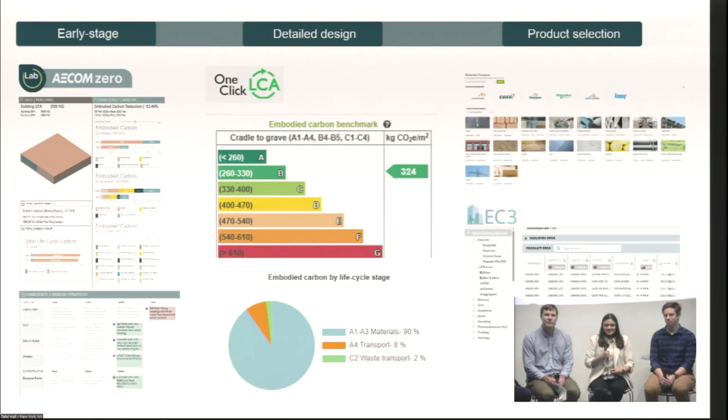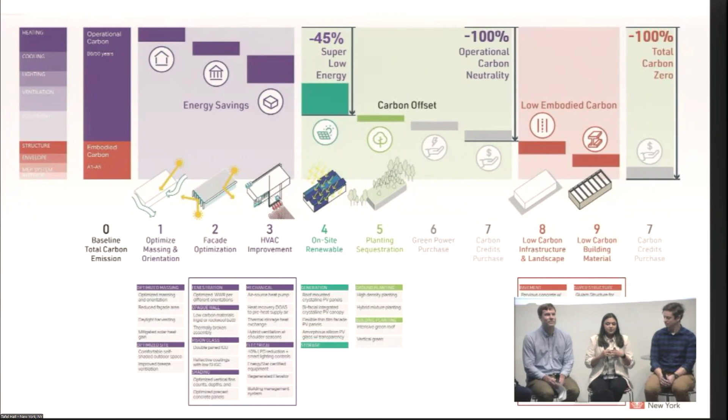One last thing I want to talk about is our decarbonization roadmap and how that integrates into our tools. This is an example of our decarbonization roadmap, which includes multiple strategies addressing operational as well as embodied carbon reductions. The tools we build out internally capture these different strategies that are part of the roadmap and integrate them into the tool itself.

This here is a snapshot from our internal tool called AECOM Zero. It's a parametric dashboard that includes all of these strategies, and what that does is enable us, from the early design stages, to understand which strategies have a higher impact towards getting us to that decarbonization goal.

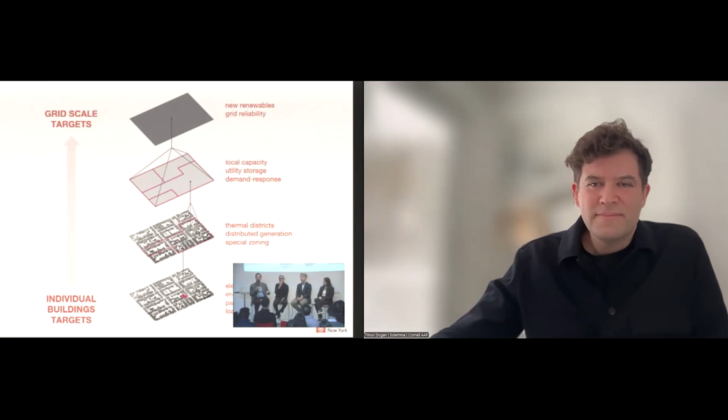Suddenly you need to think about peak loads. You need to think about things that happen in the middle, right? Like thermal district, distributed generation, distributed storage, and try to enable those larger goals that we're setting at the grid, but at the building decision scale. So the question for our panelists is, what is the role of technology in all of this? And in particular, we're going to be talking a lot about energy modeling and data analysis. So with that, I'm going to pass it to Shresh.

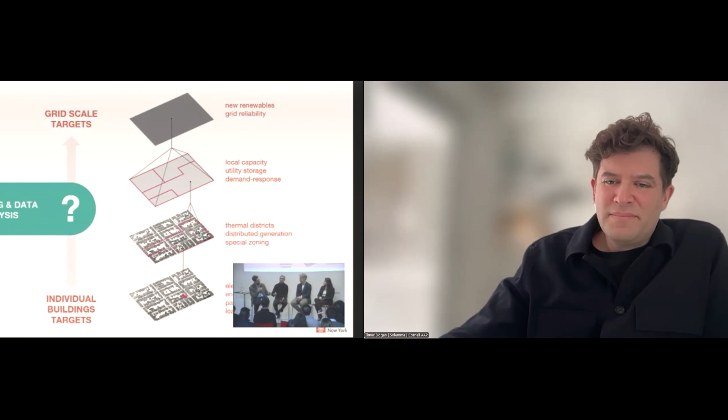All right. Hi, everyone. What I'm going to start with is how the existing building decarbonization market has matured over time, right? So the last decade or so has been about measurement and reporting. We understand our footprint. Then came investment and financial risk alignment, which said, even with the grid decarbonizing, we must cut our emissions from buildings by at least half. Now, regulations are accelerating enforcement. That will need about 1 million buildings every year to go through retrofits. As a global industry, we're working on less than 10% of those buildings per year.

Why? Because money. They say $2 trillion must be invested in retrofits every year for us to meet our climate goals. Less than 1% of that capital is allocated. Now, the skeptics in this room will say that there is very little capital, so the transition will stall. But the analysts in this room will see that each of these trends is exactly the same. It's just staggered in time. So capital will move. Capital can be deployed through sound investment decisions. What we need is the ability to make those decisions with confidence at scale. And that's the problem that we are solving for.

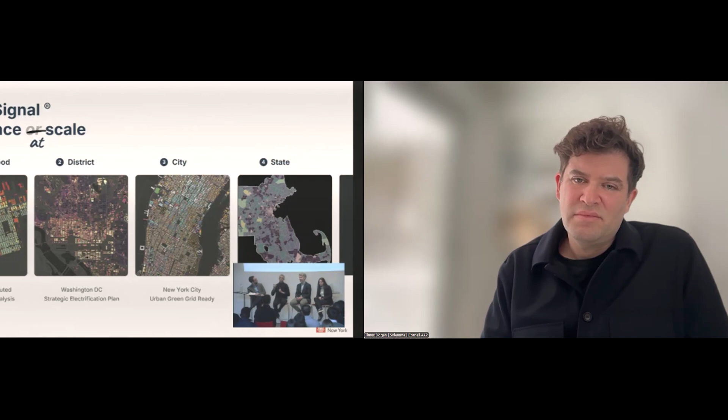From some of our early work, this is in fact with Michael, planning for distributed energy resources for the Sunset Park neighborhood in Brooklyn, to one of the most ambitious electrification plans for Washington, D.C., to understanding grid readiness if the building stock was to electrify for New York City, to policy propensity models now for the entire Commonwealth of Massachusetts. From 25,000 buildings on this side to 2.5 million buildings for Massachusetts, the underlying models remain the same. Physics-informed, probabilistic inference for decision confidence.

Because when confidence scales, this is an old slide, never mind. When confidence scales, that is when capital moves, that is when we all get hired to design and engineer. That is when implementation follows. And that's what we're all working for, right?

That was great. Can you just keep going? I'll cede my time. Very, very TED Talky. I like it. Yeah, it was very TED Talky, and you almost have like a turtleneck going on like Steve.

So this is a slide that Carlos dropped in there. So just as a disclaimer, in case there's any technical details that aren't accurate, it didn't come from NYSERDA. My fault. I apologize. For those of you who haven't worked with NYSERDA, we tend to have a lengthy approval process for anything that can see the public light of day.

But basically, we have a set of very aggressive policy objectives vis-a-vis decarbonizing the grid, scaling up adoption of energy efficiency, and decarbonizing the other sectors of our economy, which the Climate Act, passed in 2019, really sets a series of ambitious targets. Over the intervening 6 years, we've learned a lot about progress towards those goals and the importance of thinking about this transition as a generational or multi-generational journey that involves a very complex ecosystem. And so I think that, I really liked what Shresh had to say.

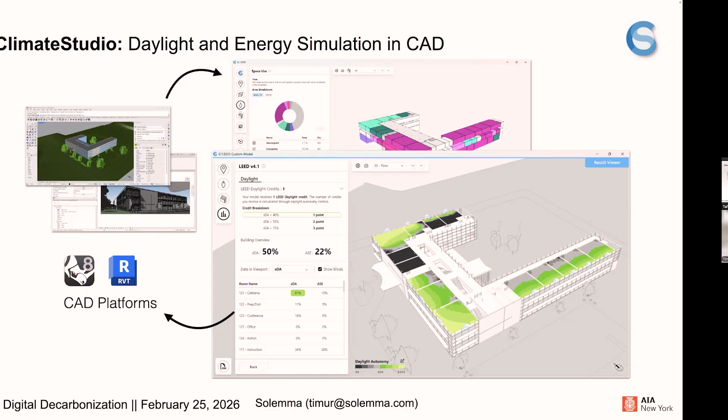And alongside that, there are of course numerous discussions around what do we simulate? How do we simulate it? At what resolution do we simulate it? What is the appropriate thing to do in the design process? And how do we visualize this in a compelling way so that we can influence some of the discussions in a positive way around design decision making and decarbonization?

From the research perspective, I want to share one project from our lab, which I think connects well with this panel. This is our work on creating digital reconstructions of cities that we then use for urban building energy modeling. We started working on this together with Ithaca when they announced that they wanted to be carbon neutral by 2030 a while back. And since then, we've built a really large pipeline that can model entire counties and larger metropolitan areas in great detail using energy modeling technology, maybe similar to what Shresh has shared.

The idea here is working with the sustainability directors of these cities and the utilities together, planning for the transition. So we spend a lot of time reconstructing a very accurate baseline model of the city, geometrically very accurate, as well as from a building physics modeling perspective. And we have shied away from using AI because we believe that physics-based modeling is still the most reliable and trustworthy approach and the most flexible moving forward as questions may change. And this has been a really interesting driver where we're learning about some interesting aspects.

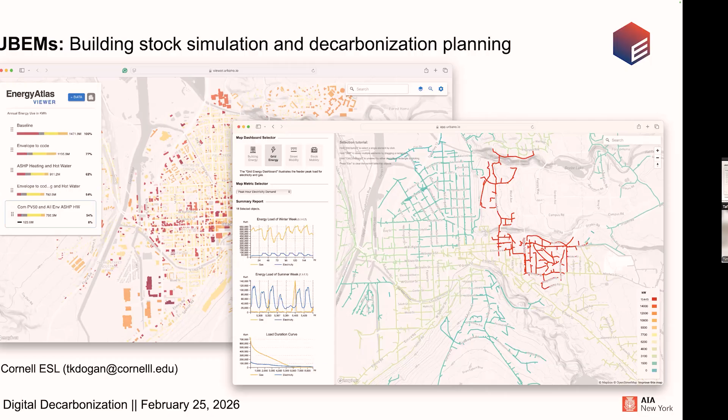All right. Okay. Thank you very much.

So of the 15 million questions that I have prepared, I'll try to compress those into something that we can manage here. But I want to start with, so the panel is set up a little bit so that we try to cover all scales of the problem, because this is truly a multi-scale problem, right? We are trying to marry this top-down decision-making of somebody who is planning for the future in terms of infrastructure, in the case of Michael, maybe trying to help decide where incentives go, which particular buildings, municipalities, programs are the most critical and when are they the most critical, right? And the decisions of somebody at the bottom that is driving a design or working with an owner.

So, Shresh, you sit a little bit in the middle between those two worlds, and you're kind of on the data analysis, modeling side. So to set the table a little bit, and then I'll ask the other side of the coin to Michael about the same question, can you paint a picture to the audience of, in your mind, to marry these two worlds, what data do we need? What granularity, is it just measured data? Do we need model data? What ideally would we need in order to make that communication and that planning possible?

So the motive here is to be able to make decisions, right? So that we can implement action. It's not the lack of data that is a problem. I've said this earlier. It's our ability to extract actionable intelligence from whatever data we have that is the problem. Money will not move until investment is sound. Investment will not be sound until there is confidence. The thesis has been that we can only predict with confidence what the outcomes of an intervention will be if we have a lot of data.

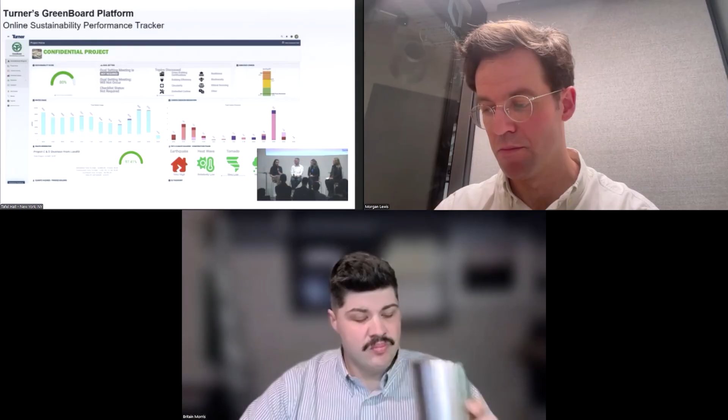And while I think that technology has been really helpful in collecting and processing and tracking and transmitting all of this information, I think what's been most impactful has been embedding what we're learning from these technologies into the standard processes that we already have to track cost, to track budget, and schedule, right?

And the last piece that I want to mention is really crucial, and it comes down to leadership, right? When leadership values decarbonization, and that is shown throughout the company, that really drives project teams to be aware of it and to hold it as a priority. And so with that, the results follow.

Thank you. Thank you, Rebecca. Great to get that perspective. So next we're going to hear from Britain on Converge.

Britain, are you there? Yep, can you hear me? I think I was on mute. We're not seeing your screen up here. Let's see. Here we go. Okay, now we're good. All right, we good to go?

All right, perfect. So good morning, everyone. Sorry I couldn't be there with you today. I was one of the many impacted by all the flight cancellations in LaGuardia over the last couple of days. So I'm coming to you from warm and sunny Oklahoma today.

My name is Britain Morris. I'm a regional manager at Converge. And at Converge, we work primarily with contractors and engineers using embedded sensors to monitor concrete strength and temperature in real time.

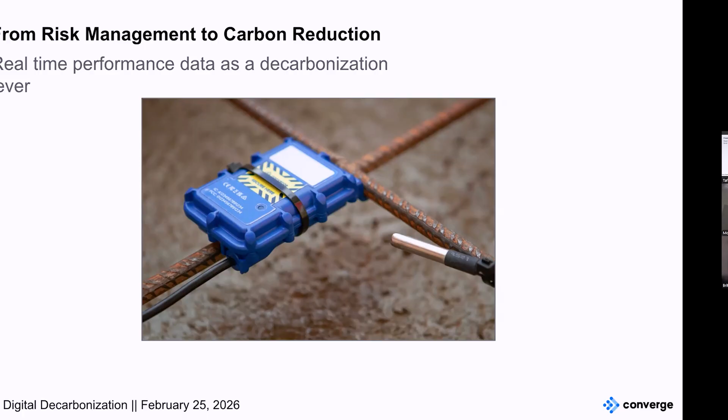We all know concrete's responsible for more than 8% of global CO2 emissions. And on job sites, one of the biggest hidden carbon drivers isn't just the cement content, it's risk and it's uncertainty. So what do I mean by uncertainty in concrete? And what does that look like? That looks like over-designing mixes. That looks like extending curing durations, running fossil fuel heaters longer than necessary, or hesitance to adopt lower carbon cement blends. What real-time sensing does is it reduces that uncertainty.

When you can see actual strength gain, not just wait on 7-day cylinder breaks, you can not only tension your PT cables at the optimal time, but you can also reduce temporary heating or optimize mixes as you move up throughout the building. In other words, this data allows our teams to shift from time-based assumptions to performance-based decisions. And I think that's really what this symposium is about.

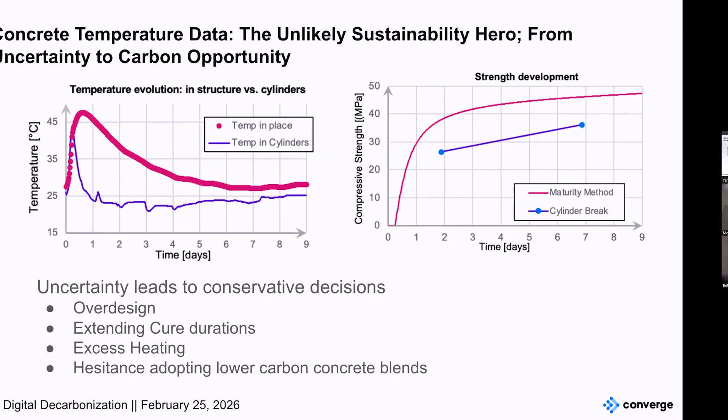Decarbonization at scale happens when sustainable practices become operationally safer and easier than what they're used to doing. So if we want lower carbon construction to become standard, we have to embed carbon conscious decision making directly into the workflows of those in the field: our site supers, engineers, and the trades. Sensors aren't going to reduce carbon on their own, but reducing that uncertainty can actually change behavior. And behavior change at scale is what we really need in the construction field. I look forward to discussing more of this throughout the panel.

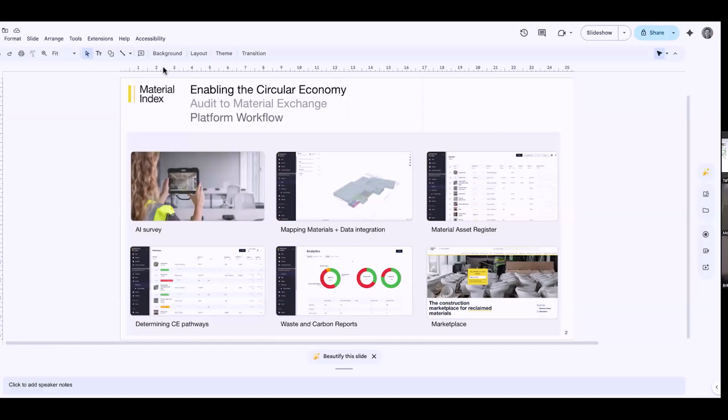No, sure. I don't think so, I think it's just transitioning. Hopefully you can see that all okay. It's almost... How's that? Yeah, no, I think it just transitions. It's okay. Okay, yeah, okay great, hopefully you can all hear me okay. I can't quite see the screen just yet, almost, I think. Okay, everyone just turn that way. I don't think... yeah, it's okay, I don't think you broke it. There we go, okay, you're up.

Okay, great. Nice to be with you today. I'm actually an architect by background and studied a bit in New York, so nice to be with you virtually. I'm co-founder of Material Index. We provide circular economy services and technology, predominantly in the UK and Australia, and are just doing our first working sustainability consultant project in New York.

I'll be talking a little bit about material reuse in construction. Why is that important? Because on average, about 60% of all waste in a developed economy comes from the strip out and demolition of buildings. There's a huge amount of carbon in those materials. Reusing those materials is a great way of saving on the production of new carbon-intensive materials. We find on the 200 projects we've been involved in, we have an average reuse rate of 19%. So there's a huge potential carbon saving from reuse.

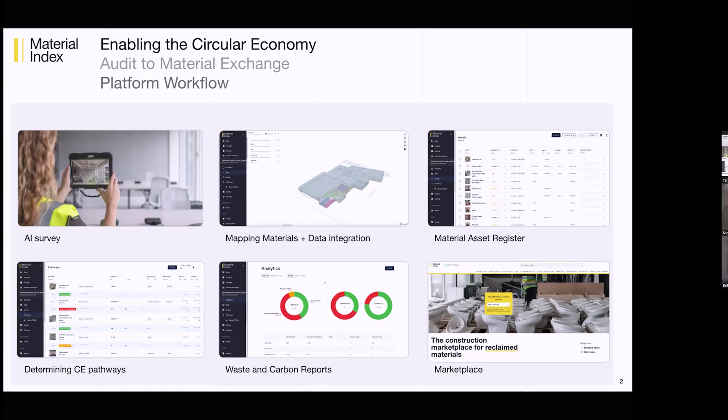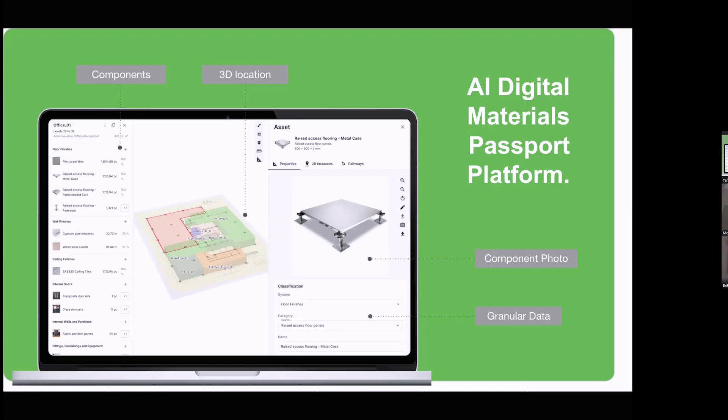And we currently exist in a world where it's actually quite easy to buy a refurbished laptop or car, but quite hard to specify a refurbished building product. The core of what we do as a business is enable very good pre-demolition audits to enable the salvage of materials. I won't go into too much detail, but the two core parts of that really are creating a great asset register of what's there, so you know what is salvageable and what you can do with that component.

And then enabling collaboration. It's really, really important that sustainability consultants, architects, contractors, and clients understand what is in a building and how to get it out. In the UK, we connect to our reclamation marketplace. Elsewhere, we provide internal marketplaces as well. It's all about reducing the risk associated with the reuse of materials. You need to show everyone in the industry that it is viable to get materials out of buildings, and that means it's then viable to get them back in. And that's a great route to decarbonization. Thanks.